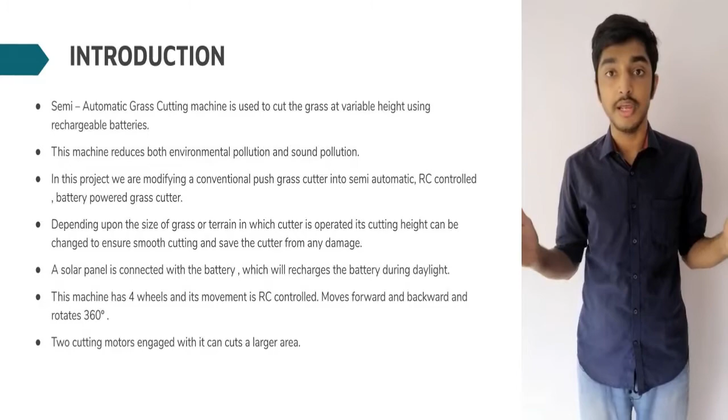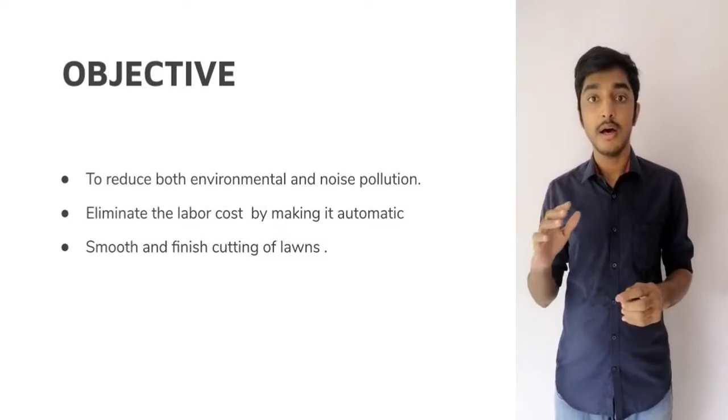There are 3 main objectives for our project. It reduces labor cost because our project is remote controlled, it reduces environmental pollution and noise pollution because it is run by a battery and there is also a solar panel, and we get a smooth and finished cutting of the grass. So these are the objectives of the project.

Now Ashish A will explain about the literature survey. Thank you. My name is Ashish A, and I am from S8MEA. My roll number is 34, and I am going to explain the literature survey of our project, semi-automatic grass cutting machine. The first one is semi-automatic grass cutting machine by Muhammed Haris and Nabeel Tabassum. It's an RC controlled and battery powered grass cutting machine. It consists of a microcontroller and obstacle sensor, and it is mainly used in sport grounds.

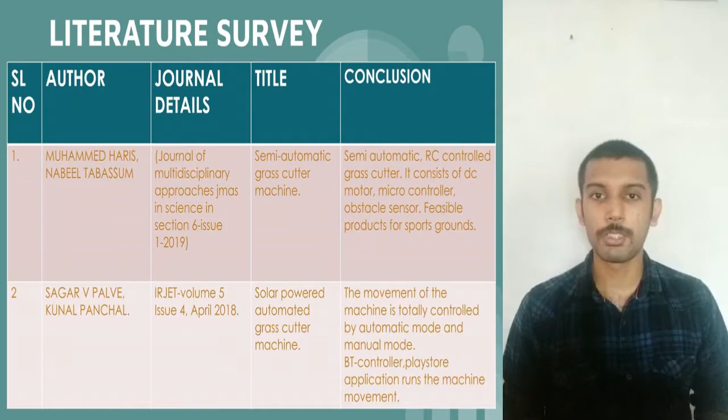The second one is a solar powered automatic grass cutting machine by Sagar V. Palve and Kunal Panchal. It can be operated in manual and automatic mode. It uses a Bluetooth control Play Store application for its movement. The third one is modification of solar grass cutting machine by Praful P. Ulhe. Here spiral roller blades are used for faster cutting of grass. The fourth one is design and fabrication of pedal operated lawn mower. It uses components like single slider crank mechanism and sickle bar.

And the fifth one is by Mamta A. Shapamohan. It's called remote control lawn mower using solar system. It's a fully automated one with obstacle sensor. The vehicle motor and cutter are interfaced with an Arduino Nano that controls all the motors.

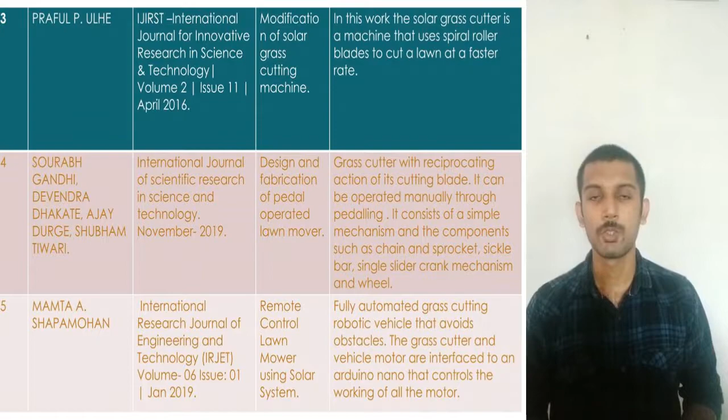So coming to the problem statement of our project, the conventional grass cutting machine causes high noise pollution, it uses fossil fuels, and we need skilled operators to operate it. So with our project we are going to solve these problems. Also, using conventional grass cutting machines we cannot cut the grass at the specific height that we want. With our project we can cut the grass at the height that we want.

So, and also the usage of a conventional grass cutting machine is quite difficult. So with the use of our grass cutting machine we can solve all these problems.

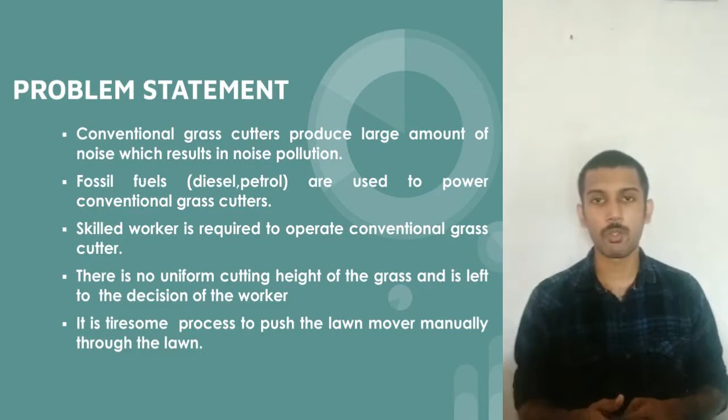So next, Bharat Thomas will explain about the methodology. My name is Bharat Thomas. I am studying in S8 ME and my roll number is 43. Today I am going to explain to you about our project, which is a semi-automatic grass cutting machine.

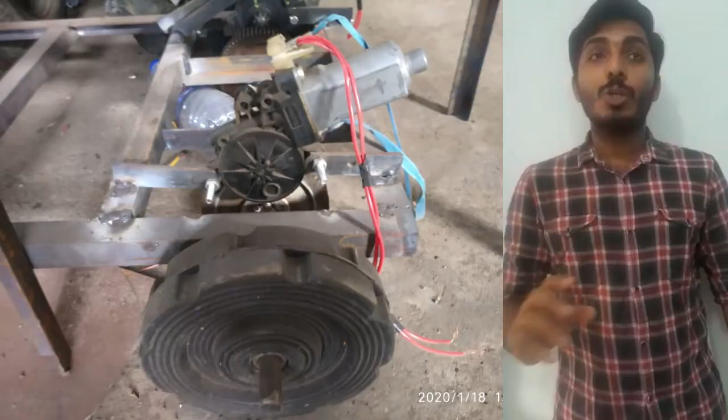So what I am going to explain to you is the working of our semi-automatic grass cutting machine, the methodology of how it works. Basically I will explain it based on the different parts which we have in our grass cutting machine. So first, what touches the ground, we have the rubber wheels.

The rubber wheels are mounted on a frame which is made of mild steel, and on this frame we have the remote control or the FM receiver, and the relays, which are then connected to the different motors. There are two motors. One motor is for cutting, which is used to rotate the cutter, and the other motor is used for the movement of the rubber wheels.

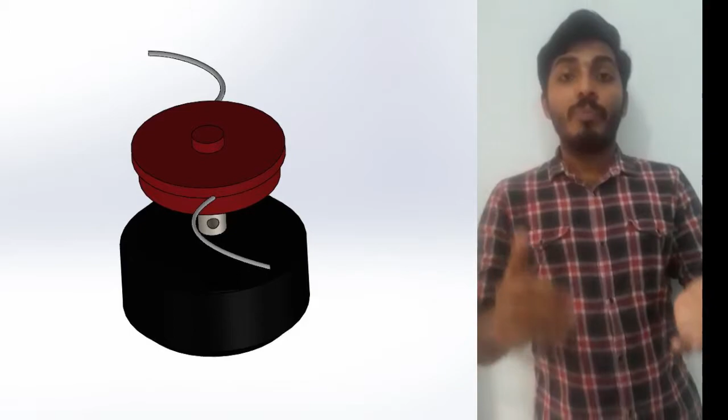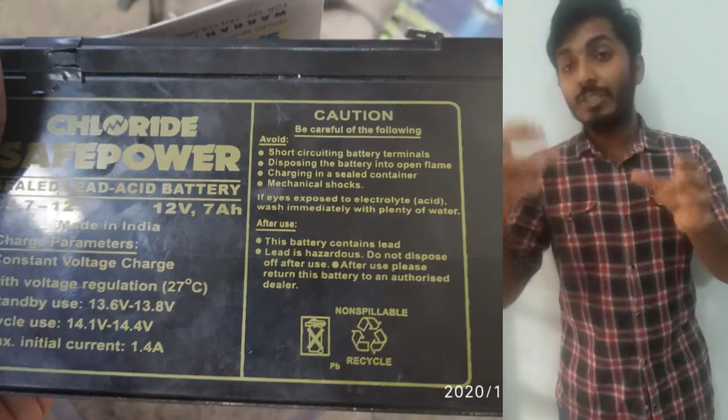The cutting motor is joined to a cutter. The cutter is a normal fiber cutter, where the fiber blade is used to cut the grass. So these are the things which we have. Then we have a 12-volt battery which powers all these systems. Then extra, we have a solar panel which takes solar energy from the sun and is used to restore the energy to the battery.

The battery can also be charged by plugging it into a normal AC circuit. It is a chargeable battery. So these are all the different components of our solar grass cutting machine. Hence, to move forward, the relay will only power the two motors which are up front. So the two motors in the front will get activated and rotate, hence the rotation will be forward.

If it is to move backward, which is given by the remote control, the same happens. The relay powers the two motors in the back and it moves towards the back. If it is left or right, the relay powers only one motor at the front, hence only that wheel will rotate to turn left, and the same is the principle when it has to move to the right. So this is how the movement works.

Then the cutter is directly coupled to the battery. You switch on the switch, the cutter starts rotating, and it can be adjusted with height variables depending on the cutting level of the grass we want. The connections of the solar panel are given directly to the battery. So this is all the working of our solar grass cutting machine. My friend Adarsh Shaji will explain to you about the fabrication and further details of our project.

I am Adarsh Shaji from S8 ME and my roll number is 7. I am going to tell about the design process, fabrication process and all other details of our project, the semi-automatic grass cutting machine. Now I am going to tell about how the design of the gears is done. The design of the spur gear is done initially. All the equations used in our design process are based on the design data handbook.

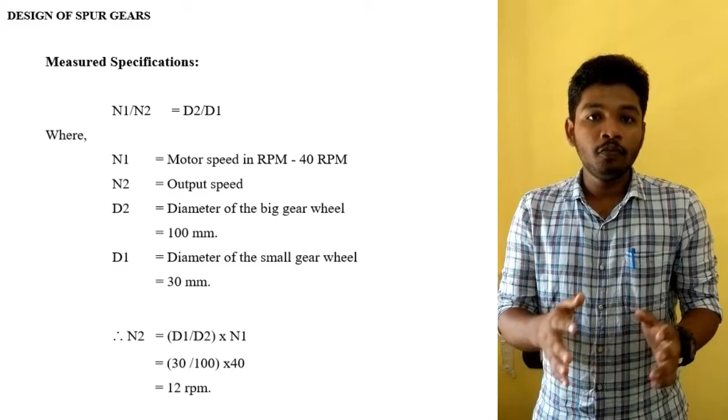Initially we set the RPM of the motor as 40 RPM, and we found the value for the gear wheel as 12 RPM. Now we move to the design of the spur gear, where we set the pressure angle as 14.5 and the number of teeth is set to be 50.

Then we selected the diametrical pitch as 18, and using the equation from the design data handbook, we found the pitch circle diameter to be 70.56, then the outer diameter. The design of the worm shaft was the next one, and we decided the outer diameter of the worm shaft to be 20 mm and the module is set to be 2. And we got the value of the pitch circle diameter using the equation from the design data handbook.

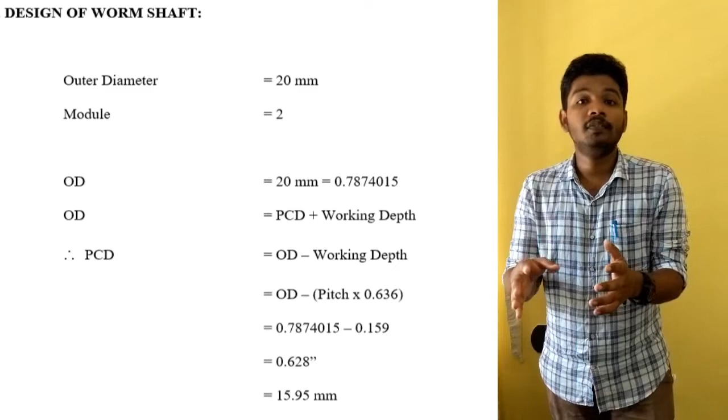Now we are going to calculate the cutting area of the semi-automatic grass cutting machine. In our machine there are 2 grass cutting motors, and the radius of one cutter is 14 cm, and hence by using the equation pi r squared we calculate the cutting area of one motor, that is 615.75 cm squared, with a tolerance of plus or minus 5 cm.

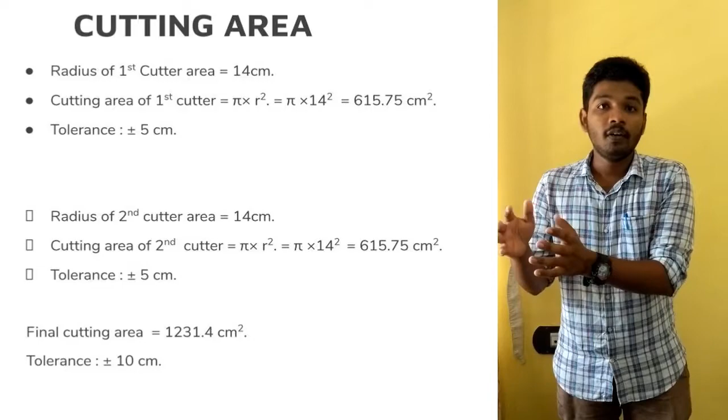And now we are having the 2 motors, so we can double the cutting area, and the final cutting area is 1231.4 cm square with tolerance plus or minus 10 cm.

Now coming to the work plan. The literature survey of our project started during August, and the procurement and collection of material, which we did through online and through direct buying from the shops, was during the period October to December. We started the fabrication works in the first week of January, and it ended between the first and second week of February, and we presented our project in Srishti 2020.

And now coming to the testing process. We made the testing within a short time. We made a testing at the hostel and also in the place where we conducted the fabrication works. And coming to the result and the reporting works, which we did during the period from March to April.

Now coming to the cost analysis of our project. The 4-channel RC control cost around 350 rupees, the 4-channel relay cost around 200 rupees, and we required a 12 volt to 5 volt converter that cost around 100 rupees. And now the Bosch motor, that means the window motor of our cars, we purchased for 3600 rupees, that means 4 motors. And the 12 volt motor for cutting the grass cost around 1600 rupees.

And coming to the trimmer head, the trimmer heads cost around 1000 rupees, that means each one 500 rupees. And coming to the 4 wheels, we used rubber wheels, the rubber tires, that cost around 600 rupees. And the battery, the 12 volt battery for our grass cutting machine, cost around 1200 rupees. The solar panel cost around 1400 rupees. And the bearings and gears cost around 800 rupees.

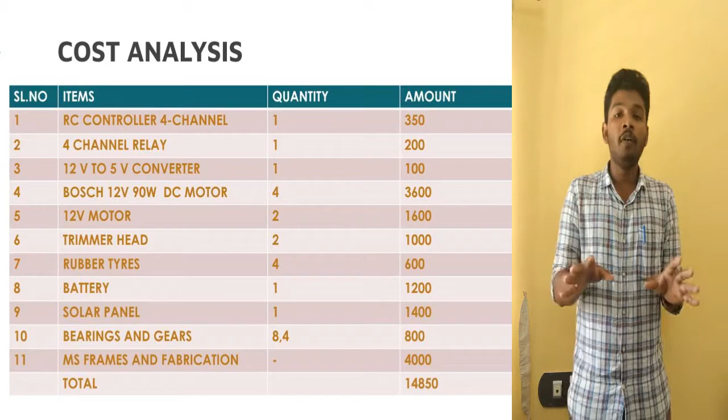And coming to the frame, that means the MS frame used for the fabrication, total cost around 4000 rupees. And overall the semi-automatic grass cutting machine cost around 14,850 rupees.

Now coming to the result of our semi-automatic grass cutting machine. During the testing period, we found that unlike the normal grass cutters, where the worker used to cut the grass at random heights, in our grass cutter we have provided the adjustable height so that we can cut the grass at uniform heights. And in the normal grass cutting machines, only one cutter is provided, but we increased the cutting area by introducing 2 grass trimmers in our semi-automatic grass cutting machine.

Also, we have provided a solar panel so that the battery is charged by solar, and it can also be charged from the AC power supply using an AC to DC converter. And during the testing period, it was found that when the grass cutting machine is run using both the power from the battery as well as from the solar panel, the grass trimmers get more power to cut the grass.

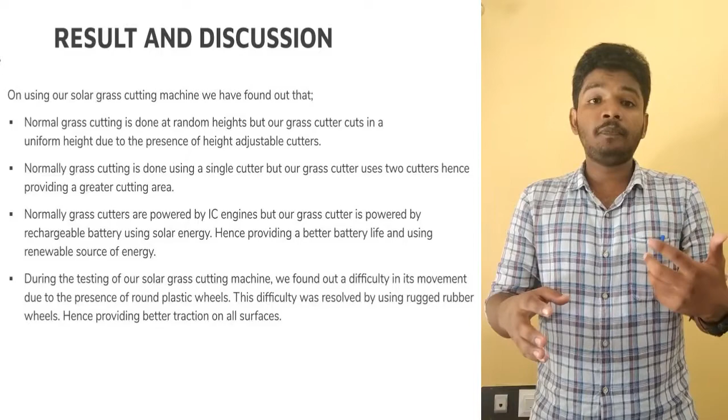And it was also found that when we used the plastic wheels instead of rubber wheels during the initial time, the traction was not good and the movement was not easy. And when we introduced rubber wheels, proper traction is made between the tires and the ground, and it gives much better movement for our semi-automatic grass cutting machine.

Coming to the conclusion of our project, semi-automatic grass cutting machine, we gained a lot of knowledge from the project, which shows us a satisfactory result. The practical knowledge we gained from doing this project includes purchasing, assembling, machining, and hands-on experience on the welding machine, CNC, lathes, etc. And the semi-automatic grass cutting machine solves the existing problem of the IC engine, that means the 2-stroke grass cutting machines that exist in the current market.

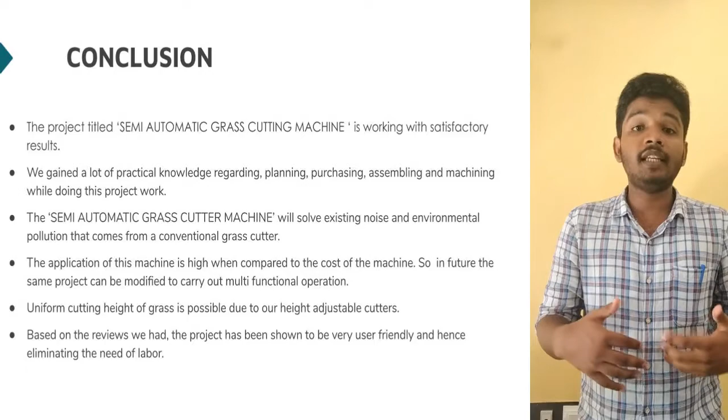It solves noise pollution and environmental pollution. And the application of our grass cutting machine has a greater advantage compared to the cost of the machine. So in future the same project can be modified. The cutter having the adjustable height for uniform cutting is very useful for cutting lawns, gardens, etc. And based on the reviews we got when we tested in our hostels, the gardeners told that it is very user friendly, and hence it eliminates the labor cost and the time.

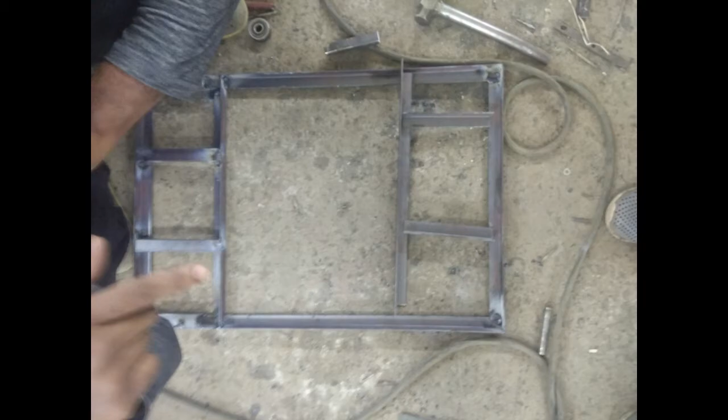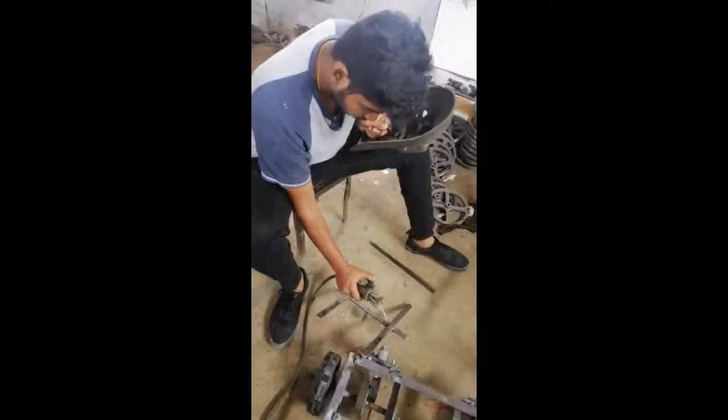Now let's see how the fabrication process has been done. Our project fabrication work gave all our team members hands-on experience on different machines like lathe, drilling, welding, and abrasive cutting machines, which we used in our project fabrication.